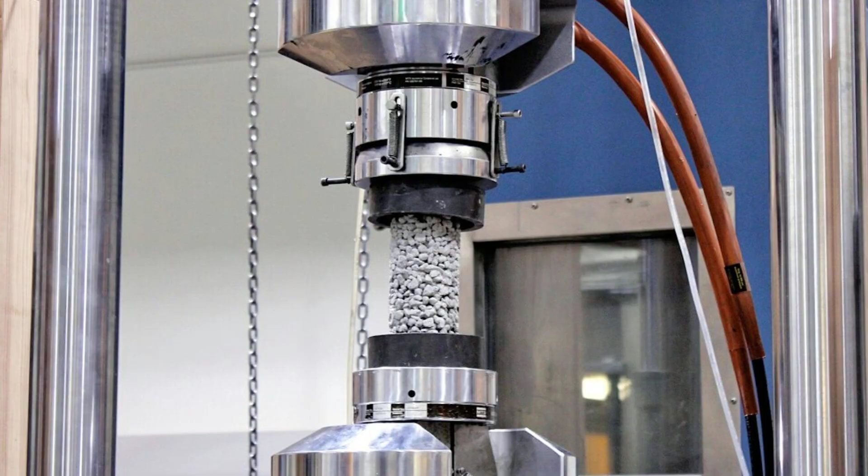But how do you knit continents together with cables and laser-guided drills? The answer's rewrite what you think is possible. Steel, concrete, and wind shape the world's most ambitious bridges, each one a laboratory for the limits of physics.

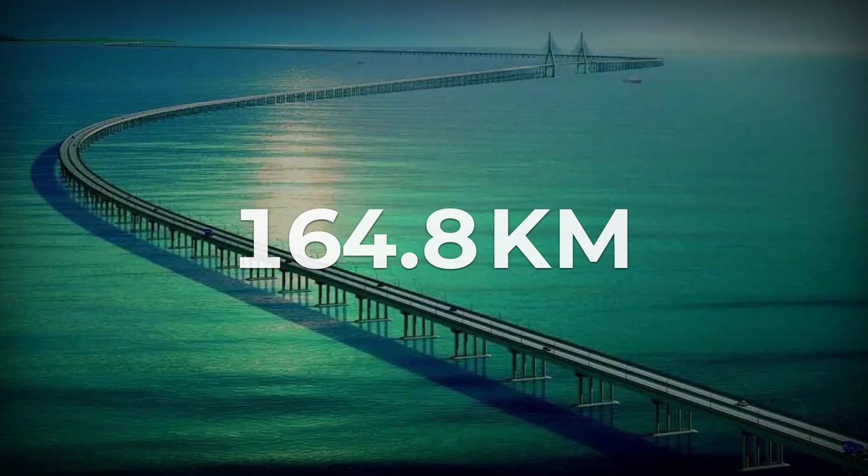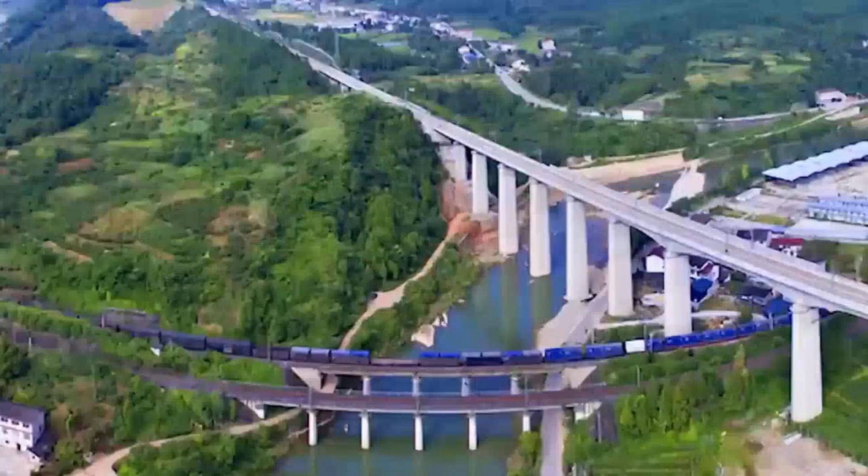In eastern China, the Danyang Kunshan Grand Bridge stretches for 164.8 kilometers, carrying high-speed trains across floodplains, rice paddies, and the Yangcheng Lake. Over 9,500 piers, set in rhythm like piano keys, lift the viaduct above shifting soils and wetlands. Modular construction lets crews slot in deck segments day after day, while seismic dampers and deep pile foundations anchor the structure against earthquakes and typhoon surges.

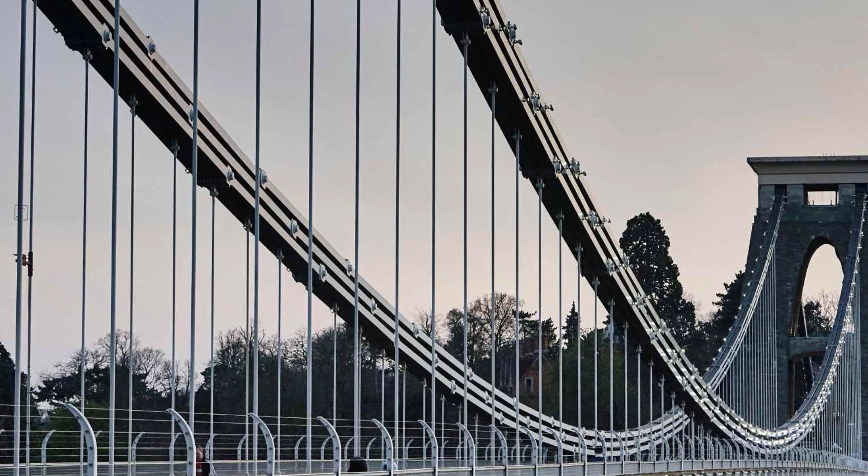But when the gap is too wide for repetition, engineers turn to cables. The Akashi Kaikyo Bridge in Japan spans 1,991 meters across the Akashi Strait. Its main cables, spun from enough wire to circle the Earth several times, are shielded by 4 layers of galvanization, wax, and polyethylene. In 1995, the Kobe earthquake shifted one tower nearly a meter overnight.

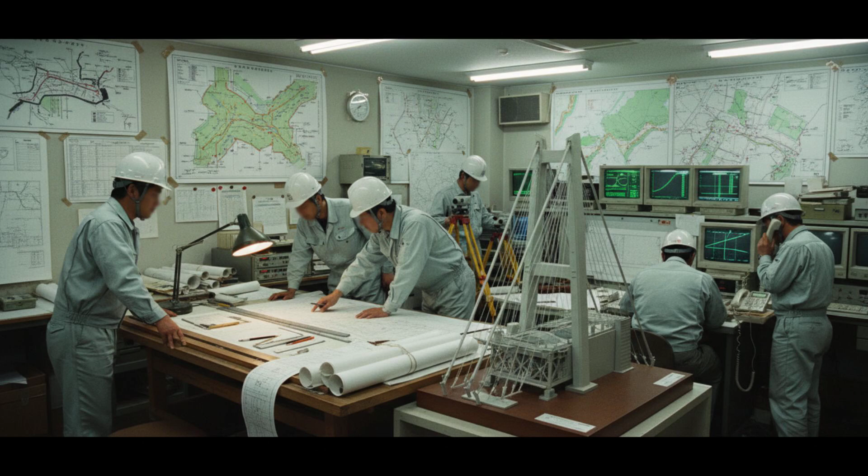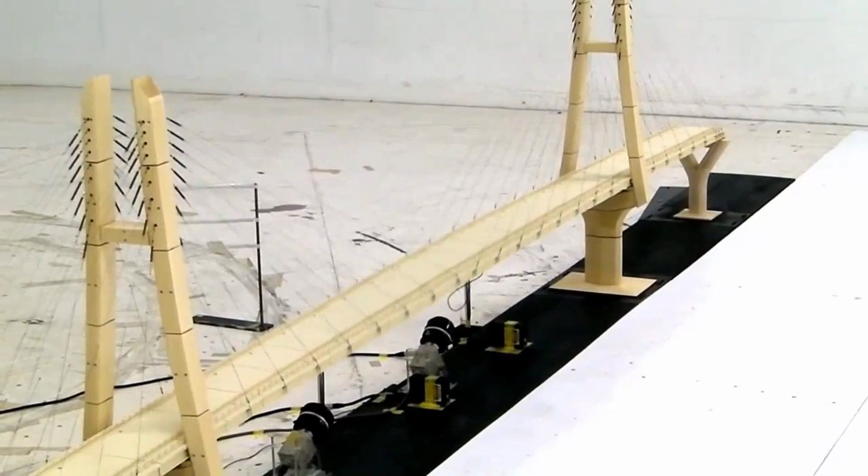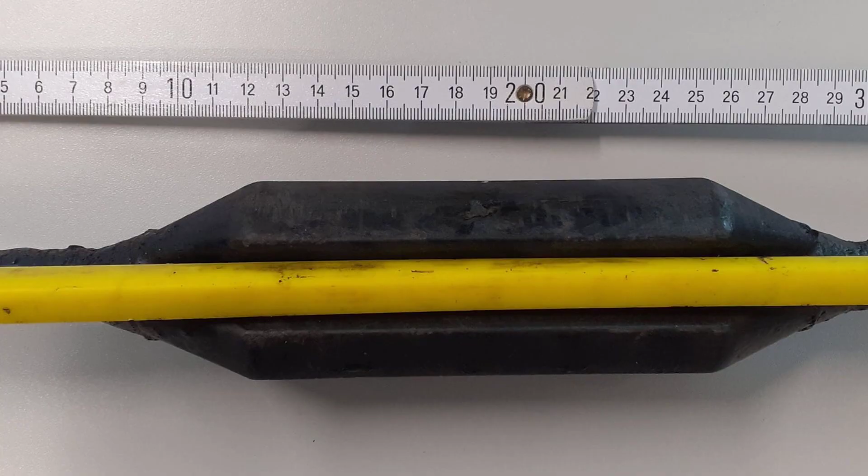Fiber optic sensors now live inside the cables, sending live data on tension and corrosion to inspectors who can intervene before disaster strikes. In southern France, the Millau Viaduct floats above the Tarn Valley on masts 343 meters tall, taller than the Eiffel Tower. Its deck, a multi-box girder, was honed by wind tunnel tests to flex, not fight, the wind. Slender piers, founded on 38-meter deep piles, allow the bridge to ride out storms with tuned mass dampers and live strain monitoring.

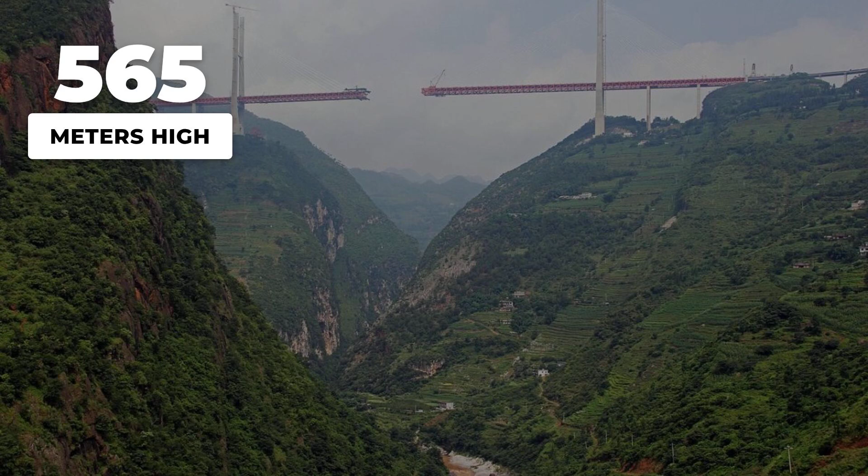China's Duge Bridge, perched 565 meters over a canyon, holds the record for the highest road deck on Earth. Engineers used double-wall box girders and bundled cable stays, tested against 200 km/h winds, then anchored into bedrock with gravity blocks and rock bolts. Inclinometers and GPS sensors track every millimeter of movement, ensuring stability above the clouds.

Each of these bridges is more than a path between 2 points. They are experiments in stretching steel, taming wind, and outsmarting gravity. At their heart is a relentless process of testing, monitoring, and learning, led by engineers who know that a bridge's real strength is measured not just in tons of steel, but in its ability to adapt to the unexpected.

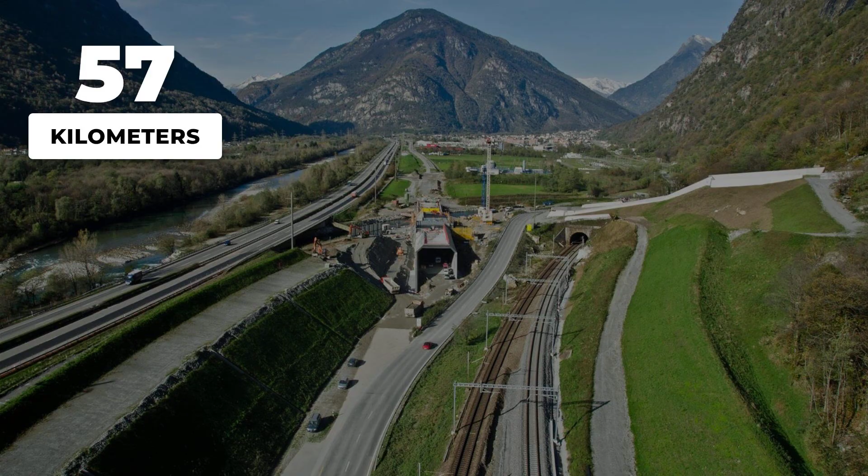Deep beneath the Swiss Alps, the Gotthard Base Tunnel slices through 57 kilometers of bedrock, longer than the Channel Tunnel and deeper than most skyscrapers are tall. Crews spent 17 years carving 2 parallel tubes, working under nearly 2,000 meters of mountain. Temperatures soared above 40 degrees Celsius.

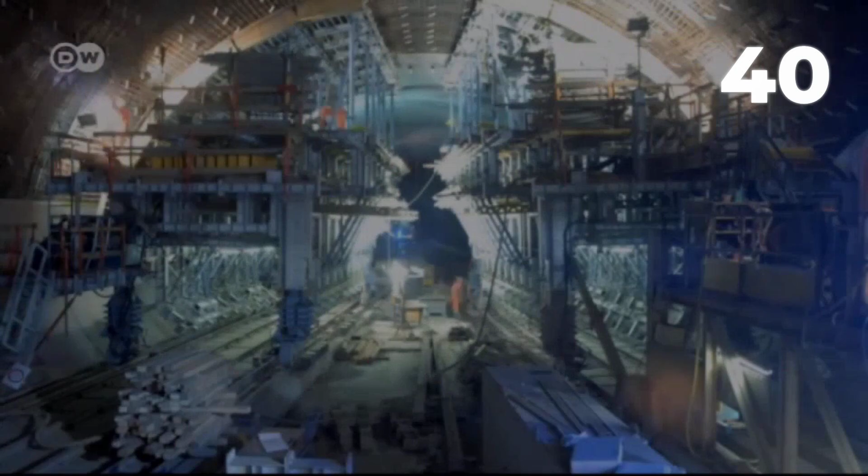Tunnel director Marcus Weiss called the greatest challenge cooling the mountain itself. 4 tunnel boring machines, each the length of a football field, chewed through hard gneiss and unpredictable squeezing zones, sometimes advancing only centimeters a day. Laser alignment kept the 2 ends on course, with the final breakthrough missing by less than 5 millimeters.

Ventilation systems blasted cool air to the front lines, while emergency shafts and hundreds of cross passages provided escape routes for crews facing sudden rock bursts or floods. In 2011, a cooling system failure trapped 17 miners for 9 hours, an ordeal that tested every safety protocol the team had built. Emerging from the tunnel, the world's fastest trains race across continents.

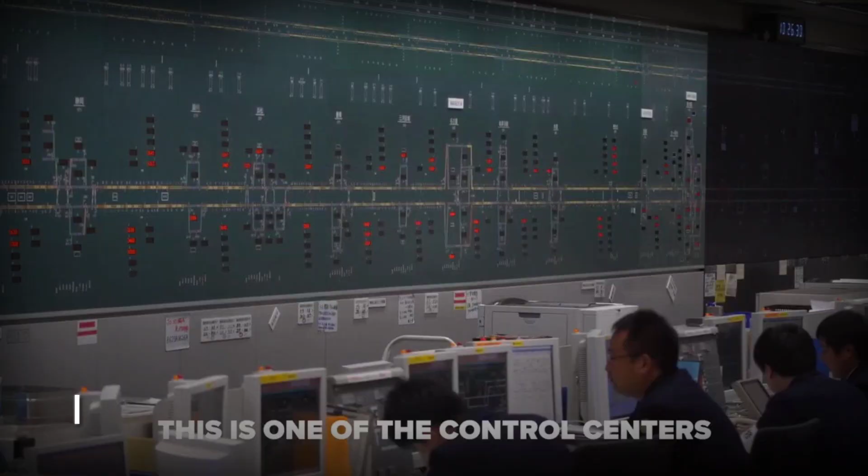Japan's Shinkansen is a lesson in discipline and precision. Bullet trains reach up to 320 km/h, yet average less than 30 seconds of delay per year. The rail operations chief credits a culture of punctuality that drills every staff member, from drivers to platform cleaners, in synchronized routines. Seismic sensors line the tracks. If an earthquake is detected, power cuts instantly and trains brake to a stop.

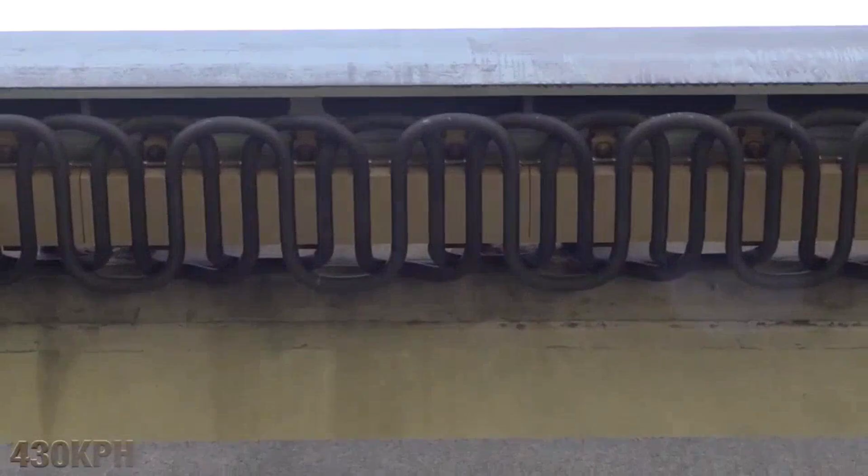The Shanghai maglev, floating on a cushion of magnetism, hits 431 km per hour on its short airport run. No wheels, just electromagnetic force keeping the car levitating millimeters above the guideway. Engineers monitor every joint and coil for heat and vibration, keeping the system in balance at speeds that rival a jet on approach.

Japan's next leap, the Chuo Shinkansen maglev, aims for 500 km per hour, tunneling under the Southern Alps for most of its route. Over 80% of this new line will run underground, with vacuum-sealed tunnels and pressure-controlled cabins to keep passengers comfortable as they cross mountains faster than most planes. These networks, both above and below ground, rely on relentless accuracy, millimeter tolerances, real-time data, and a mindset that treats every second and every degree as critical.

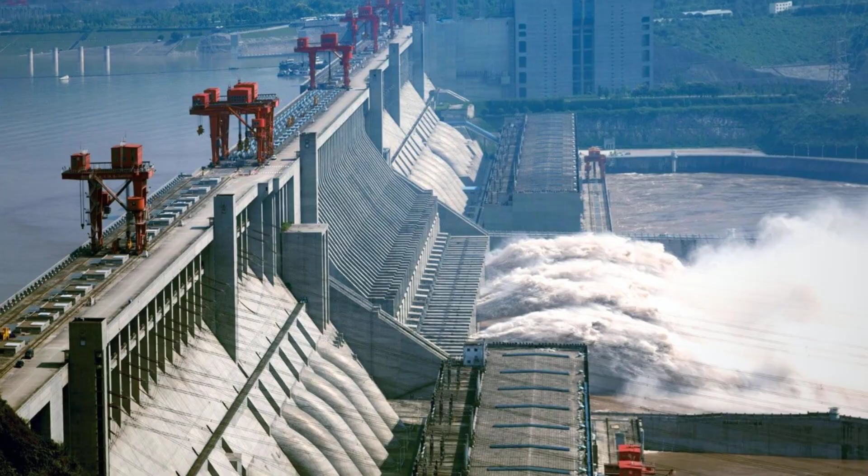On the upper Yangtze, concrete and water collide at a scale that bends imagination. The Three Gorges Dam stretches more than 2 kilometers across the river, rising 181 meters high, its bulk locking in a reservoir that snakes for over 600 kilometers upstream. Deep inside, 32 turbines spin out a combined 22,500 megawatts, enough to power entire provinces.

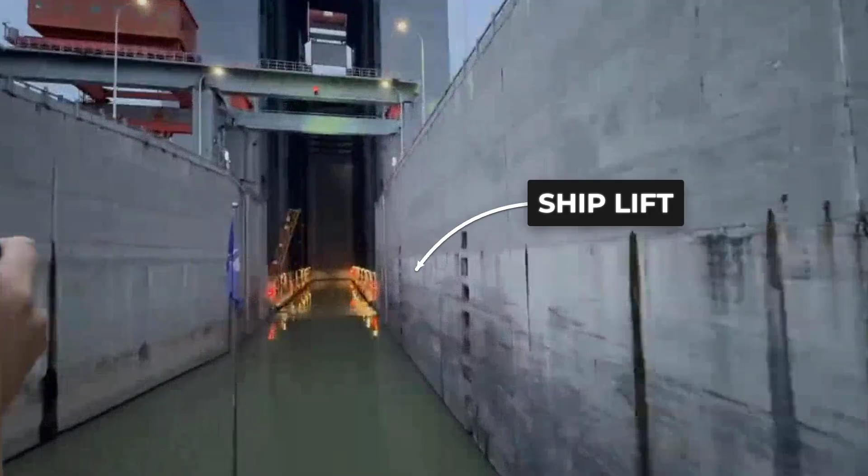But size is only the beginning. The world's largest ship elevator, nearly 100 meters tall, lifts vessels the height of a skyscraper in a single, counterweighted chamber, a vertical shortcut that slashes hours off river journeys for cargo ships too massive for the 5-stage lock.

Yet the real challenge is not just holding back the river, but keeping it alive. Every summer, the Yangtze surges with silt, threatening to choke turbines and raise the riverbed. At the heart of the dam's control room, the systems manager tracks sediment levels like a doctor reading vital signs. When the time comes, bottom sluice gates roar open, flushing millions of tons of mud and sand downstream in a controlled pulse. It's a delicate balance, too little, and the reservoir fills with silt. Too much, and downstream farms and cities risk flooding.

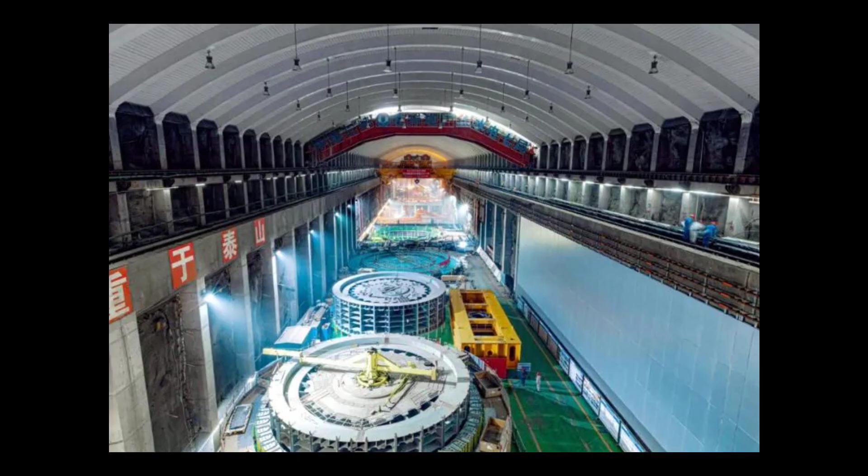Further west, the Baihetan Dam pushes arch design to new heights. Its double-curved concrete wall, nearly 300 meters tall, channels the Jinsha's force into granite cliffs. 16 giant turbines, each 1,000 megawatts, hum beneath the surface, cooled by water drawn from deep in the reservoir.

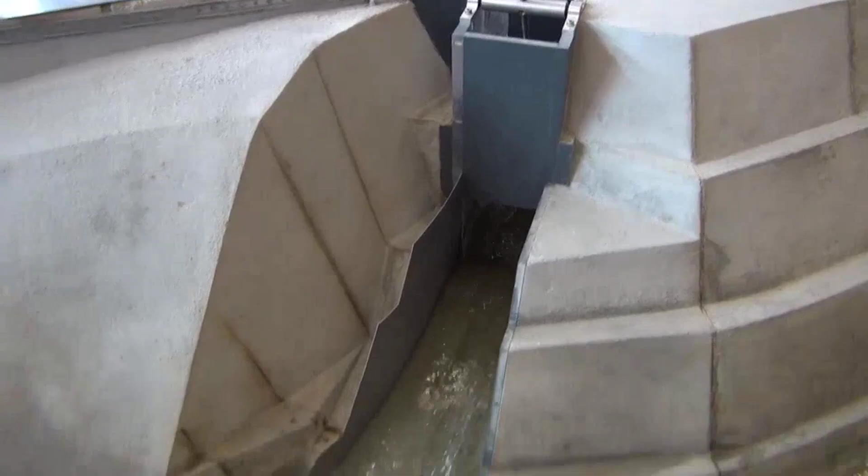Here, silt management is a team effort. High-velocity outlets at the base blast sediment out during peak flows, while a network of downstream dams catches what escapes.

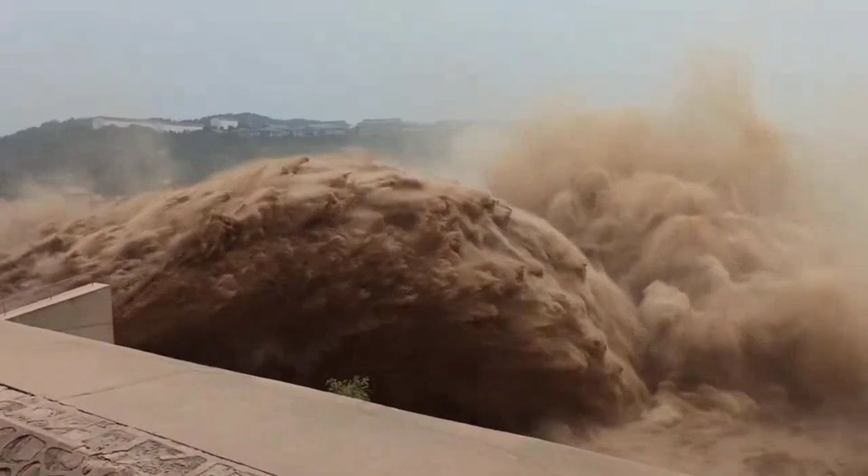Downriver on the Yellow River, Xiaolangdi's engineers face a river so muddy it's called China's sorrow. Their answer? Let the dam breathe. Each summer, water levels drop and silt tunnels open wide, sending a brown surge racing toward the sea. In a good year, up to 800 million tons of sediment clear out, an engineered exhale that keeps the river from rising and the turbines from grinding to a halt.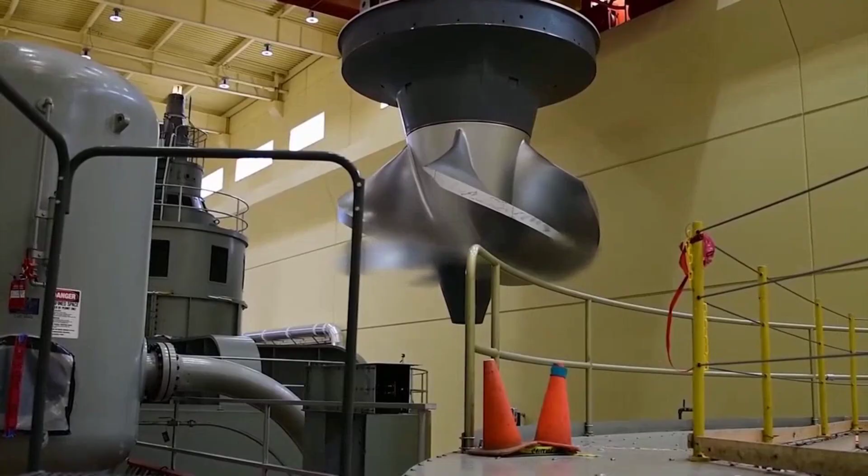The systems manager describes it as a negotiation. Power, flood safety, and a living river all pulling in different directions. Every decision is a trade, measured in megawatts, tons of silt, and the pulse of water that connects mountain to sea.

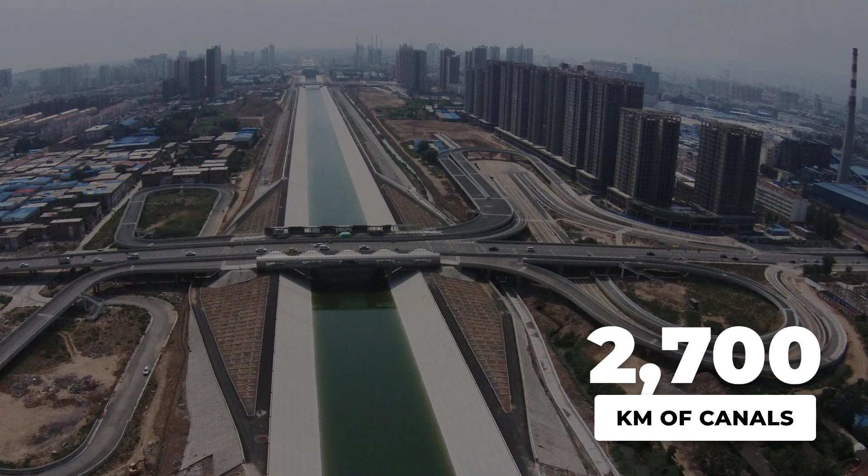Nearly 2,700 kilometers of canals and tunnels now move the Yangtze's water north, reshaping China's geography. The South, North Water Transfer Project, relies on pumps so large they could power small cities, lifting water in stages, sometimes 23 times along a single route.

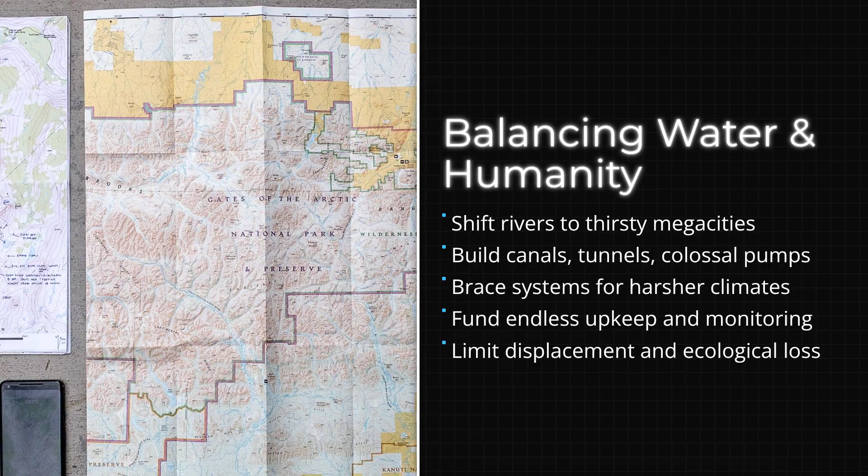Regional planners weigh each decision. Sending water north means less for southern farms and wetlands. Over 300,000 people were relocated, entire towns rebuilt on higher ground to clear the canal's path. For the planners, the work is a constant negotiation between supply, demand, and the human cost of redirection.

Tokyo's G-Cans system faces the opposite problem: sudden floods. 5 shafts, each deeper than a 15-story building, stand ready to swallow rivers when typhoons hit. Water surges through tunnels wide enough for trucks, gathering in a vast underground chamber lined with 59 concrete pillars. 4 jet turbine pumps, each matching a locomotive's horsepower, can move 200 cubic meters per second into the Edo River.

Every summer, the system is tested by downpours that once brought the city to a halt. Since G-Cans began, flood losses have halved, but planners warn that climate extremes are pushing the system to its limits. In the Netherlands, the Maeslantkering barrier guards Rotterdam.

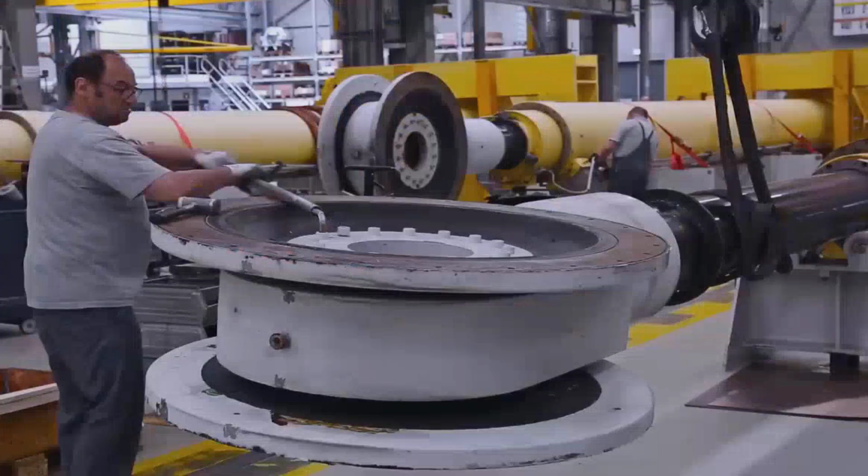Twin steel gates, each the length of a football field, swing shut when North Sea storms threaten, sealing off the port. Ball joints 10 meters across anchor the gates, inspected for fatigue cracks after every closure. A coastal defense engineer describes the annual ritual: ultrasonic scans, pressure tests, lubrication. The barrier has closed only 28 times in over 25 years, but each closure is a reminder. Millions of lives and Europe's busiest port depend on its strength.

Dubai's deep tunnel stormwater system takes a different approach, racing water out to sea. Pumps move 40 cubic meters per second through a 10-meter wide tunnel monitored for cracks and settlement. Here, maintenance is a race against time, because one failure could turn highways into rivers.

Where the land runs out, engineers invent new ground. The Hong Kong-Zhuhai-Macau Bridge stretches 55 kilometers across the Pearl River Delta, a chain of viaducts, artificial islands, and an immersed tunnel that disappears beneath the shipping lanes.

In 2014, a sudden rush of water flooded the undersea tunnel. A coastal megasystem engineer, still haunted by that day, describes the scramble. Divers sealed leaks with concrete bags, while giant pumps fought to hold the line. The incident forced a redesign of every segment seal and rewrote the safety playbook for the rest of the project. Today, the bridge tunnel carries tens of thousands of vehicles daily, its joints and pressure sensors checked with the vigilance of a submarine crew.

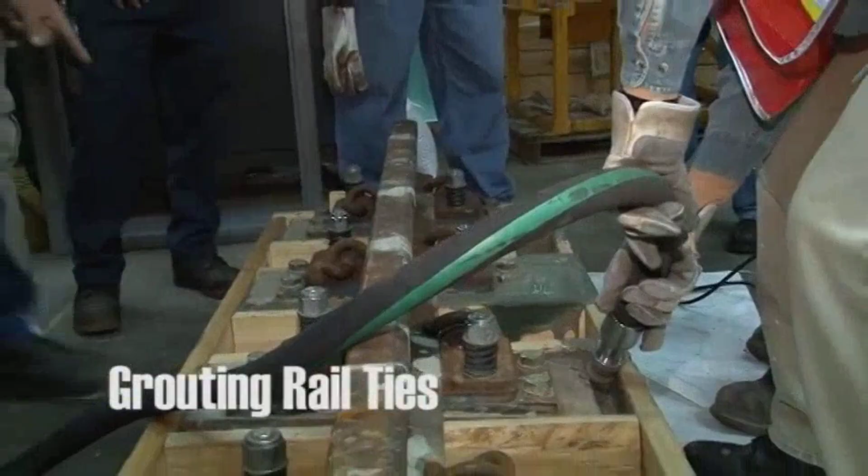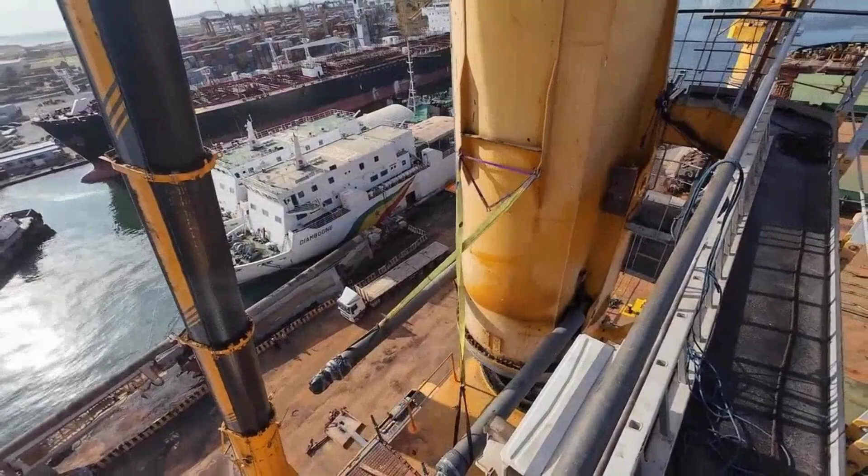On Singapore's western edge, the Tuas megaport rises from land that didn't exist a decade ago. Reclamation here means more than just piling up sand. Automated stacking cranes glide across the world's largest container yard, tracking every box by GPS. Algorithms choreograph the movement of ships and trucks, squeezing maximum throughput from every square meter. Beneath the surface, engineers monitor for ground settlement, adjusting fill, re-leveling tracks, and injecting grout to keep the port flat as it grows. Every few years, teams review sensor data and recalibrate, knowing that even a few centimeters of tilt can jam the automated yard.

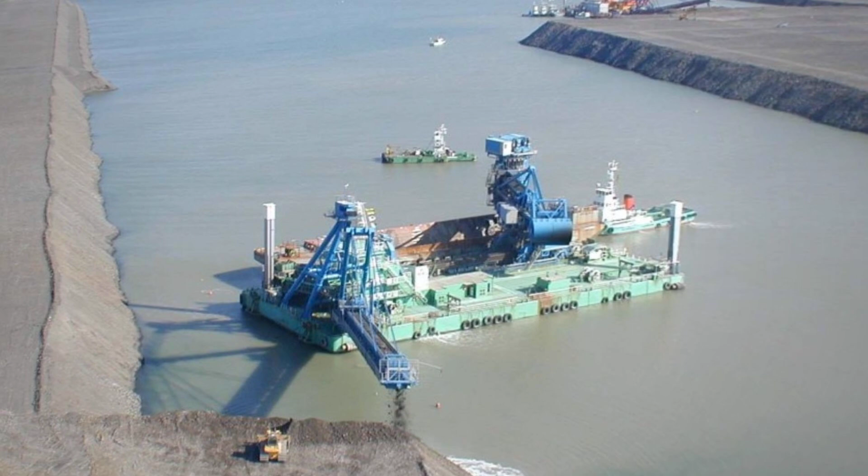Osaka's Kansai International Airport floats on a man-made island surrounded by seawalls and anchored to seabed piles. Yet the weight of runways and terminals pushes the ground down year after year. Maintenance crews inject concrete beneath the foundations, raising sunken sections back to level. The airport's survival depends on this cycle: predict, measure, correct, turning crisis management into routine.

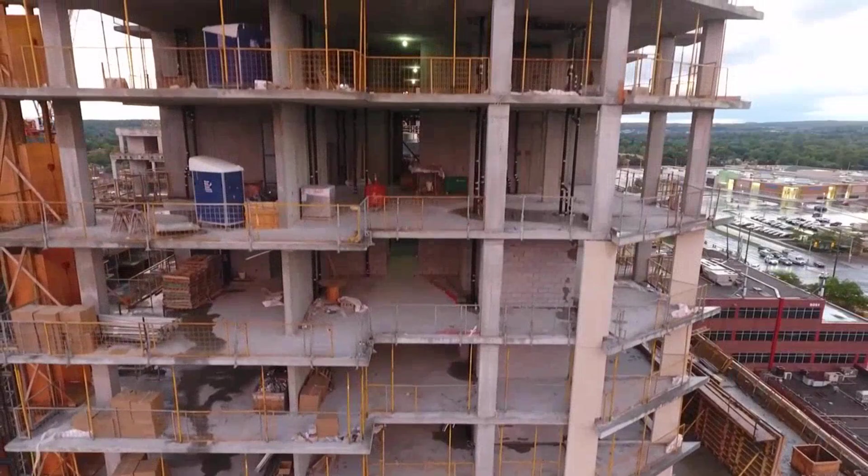Across these sites, the boundary between land and sea is never settled. For coastal engineers, stability is a moving target, and the only constant is adaptation. Glass, steel, and concrete reach for the clouds in a new kind of arms race, one where height, spectacle, and digital skin redefine the skyline.

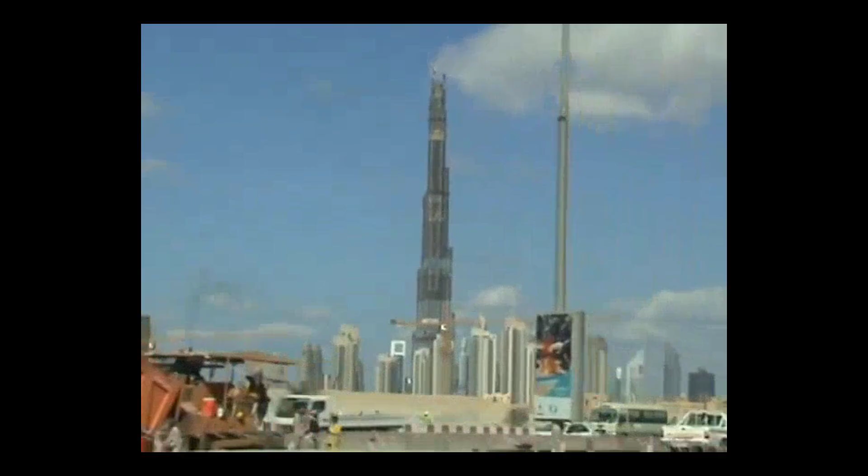In Dubai, the Burj Khalifa rises 828 meters above the desert, its Y-shaped core and staggered setbacks breaking the wind into harmless eddies. During construction, a single concrete pour climbed 600 meters in a 32-hour marathon, with teams scrambling to clear a jammed pump line before the mix set solid.

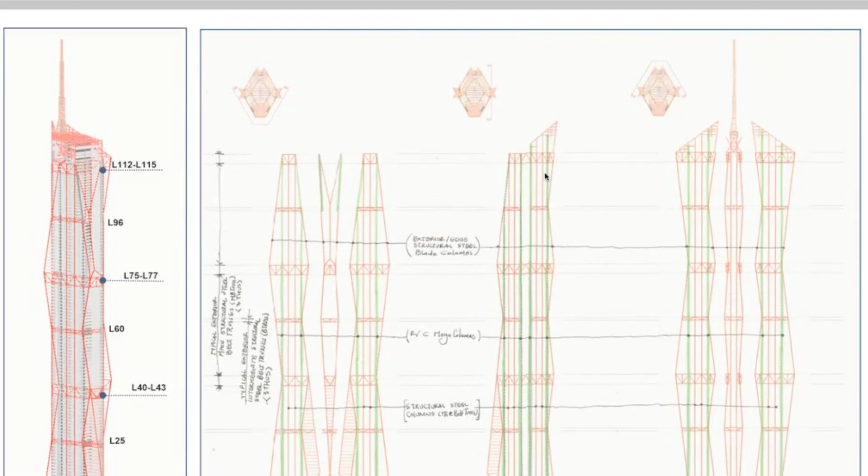The project's lead engineer still recalls improvising with ice slurries and custom blends to keep the pour alive. In Kuala Lumpur, Merdeka 118's triangulated glass facade twists 679 meters above the old stadium, its sharp edges channeling typhoon winds down the structure. The architect behind its shimmering skin calls it a fusion of tradition and tech, each panel angled for stiffness, light, and a nod to the city's past.

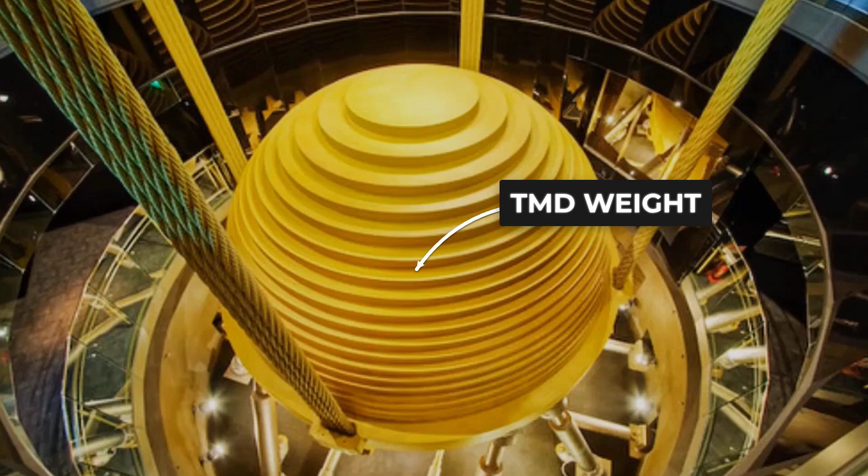Shenzhen's Ping An Finance Center cuts wind loads by nearly half with its aerodynamic taper. Tuned mass dampers, giant steel weights, sway inside the crown, calming the tower when storms roll in.

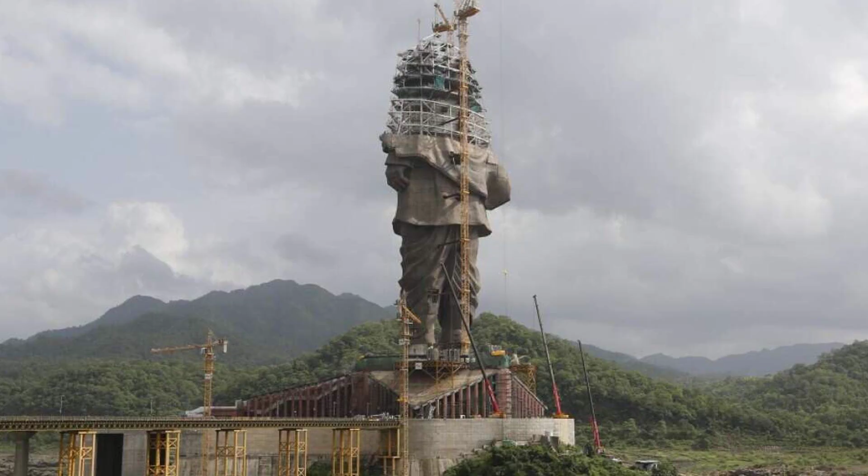But vertical ambition isn't just about height. India's Statue of Unity stands 182 meters tall, assembled from 2,000 bronze panels, each mapped by GPS to fit the contours of a national hero.

In Las Vegas, the Sphere turns architecture into a media event. Its 112-meter dome is wrapped in a programmable LED shell, the world's largest digital canvas.

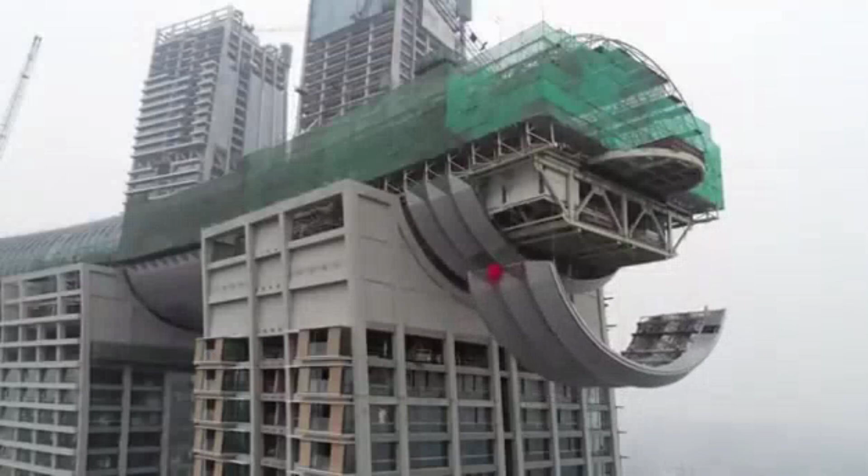Across Chongqing's skyline, the Raffles City Crystal floats 250 meters up, a 12,000-ton sky bridge linking 4 towers. Below, the rain vortex at Jewel Changi Airport drops water 40 meters through a glass funnel, its pulses and light shows choreographed by computer.

For these megaprojects, engineering and art collide. Towers become wind-tuned sculptures. Buildings double as instruments, screens, and symbols, each one pushing the limits of what a city can be.

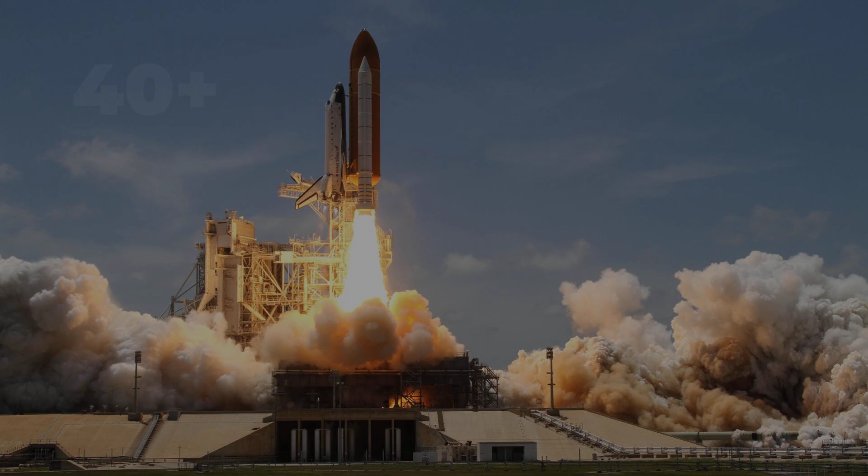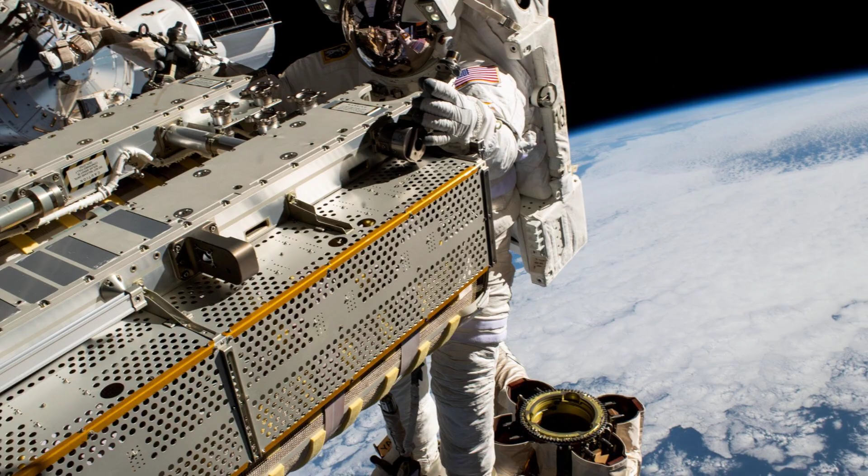400 kilometers above Earth, the International Space Station circles the globe every 90 minutes. Its assembly demanded more than 40 launches, with modules crafted on 3 continents, each tested for the smallest flaw. Astronauts rely on welds X-rayed for hidden cracks, seals pressed to perfection because a single mistake can't be fixed from the ground. The ISS is a living experiment, its systems upgraded in orbit, every repair a high-stakes gamble.

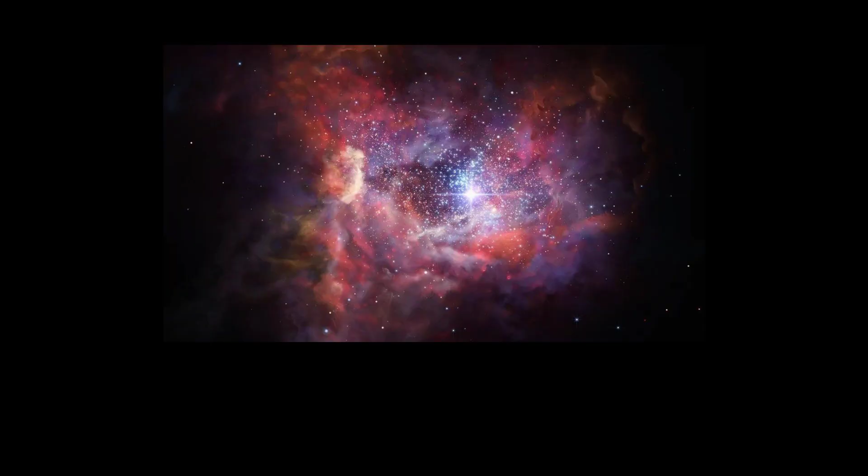Farther out, the James Webb Space Telescope sits 1.5 million kilometers away, beyond the reach of rescue. Its gold mirror, folded tight for launch, had to unfold flawlessly in the cold of space. Cryogenic cooling chills its sensors to just above absolute zero, letting it catch the faintest glow from the universe's first stars. For the deployment scientist, there was no backup plan. 107 release mechanisms all had to work, or decades of hope would vanish.

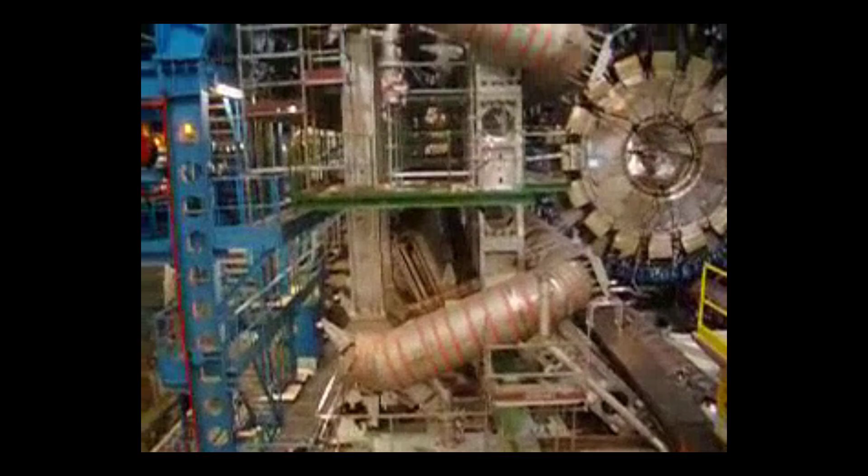Beneath the French-Swiss border, the Large Hadron Collider forms a 27-kilometer ring, cooled by 120 tons of liquid helium. Protons race at nearly light speed, guided by magnets so precise that a weld out of tolerance or a magnet misaligned by a millimeter can halt the world's most powerful experiment.

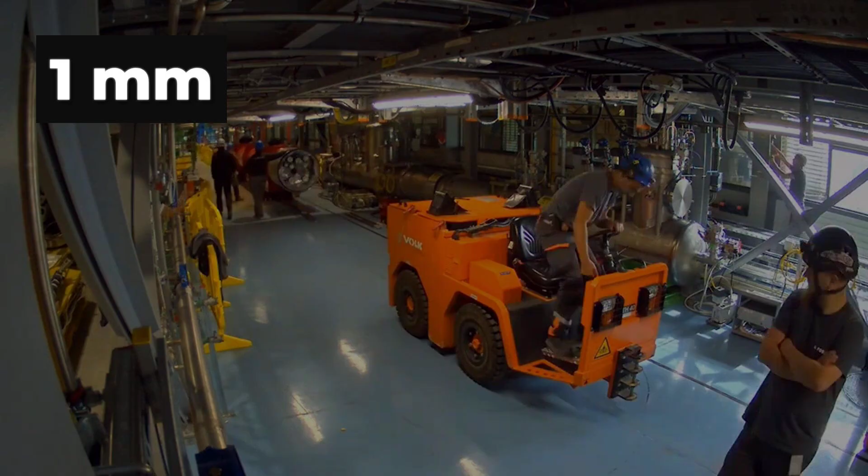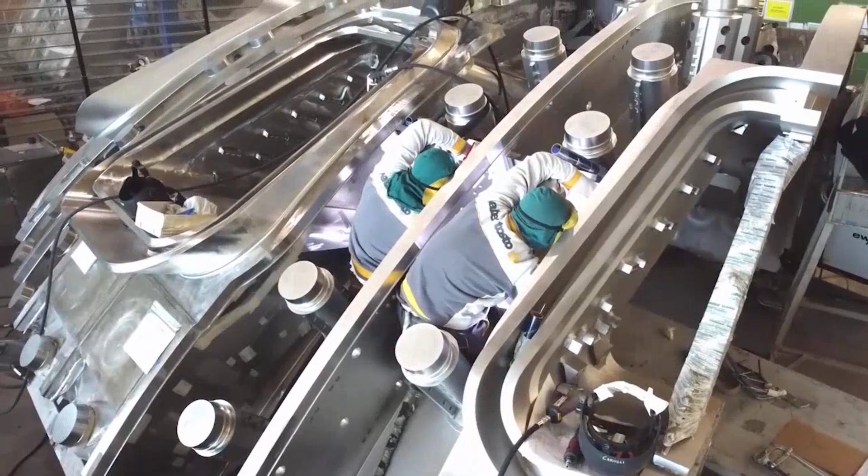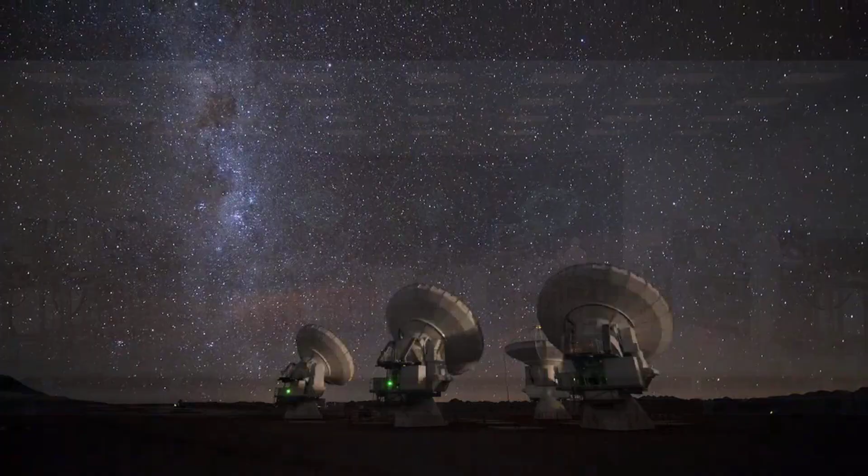In southern France, ITER tries to bottle a star, fusing hydrogen at 150 million degrees. Every weld on its vacuum vessel is a potential failure point. Across South Africa and Australia, the Square Kilometre Array listens for signals from the dawn of time. Its antennas stretched across continents, fighting interference from cell phones and satellites. Here, ambition is measured in microns and megawatts, but fragility is the true test.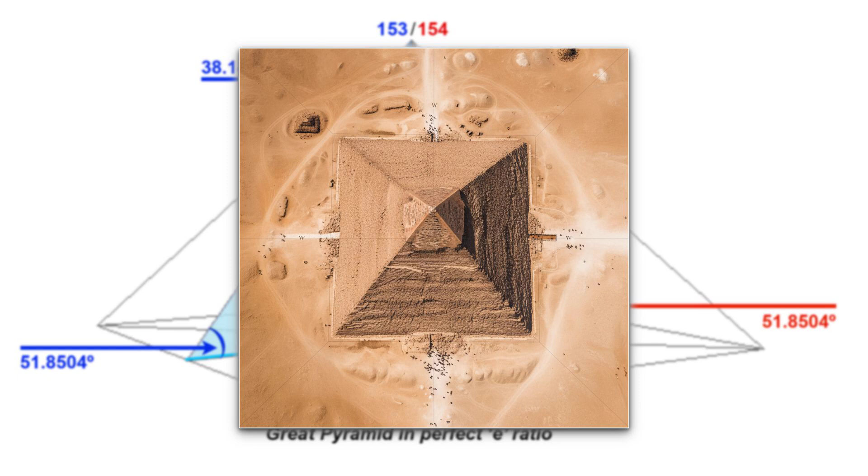Before steel and concrete, ancient builders set standards that still test the limits of modern engineering. The Great Pyramid at Giza, assembled from over 2 million limestone and granite blocks, stands with its base aligned to true north within a fraction of a degree. Each side deviates by less than 4 centimeters across 230 meters, a precision achieved with sighting rods, ropes, and the stars. Some blocks, weighing up to 15 tons, came from quarries as far as Aswan, floated down the Nile during its annual flood.

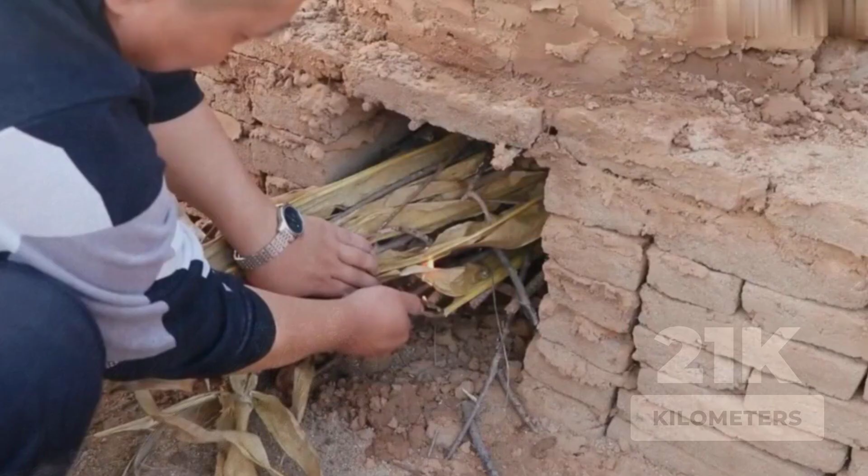The Great Wall of China stretches more than 21,000 kilometers, crossing mountains and deserts. Ming-era builders fired bricks on site, shaped the wall to the land, and raised watchtowers wide enough for marching columns and signal fires. The wall's scale and endurance speak to a vision that spanned centuries.

In Cambodia, Angkor's engineers built a city of water. Vast reservoirs, canals, and moats channeled monsoon floods, irrigating fields and cooling temples. LiDAR scans reveal a hidden network of embankments and ponds beneath the jungle, exposing a metropolis shaped by hydraulic mastery.

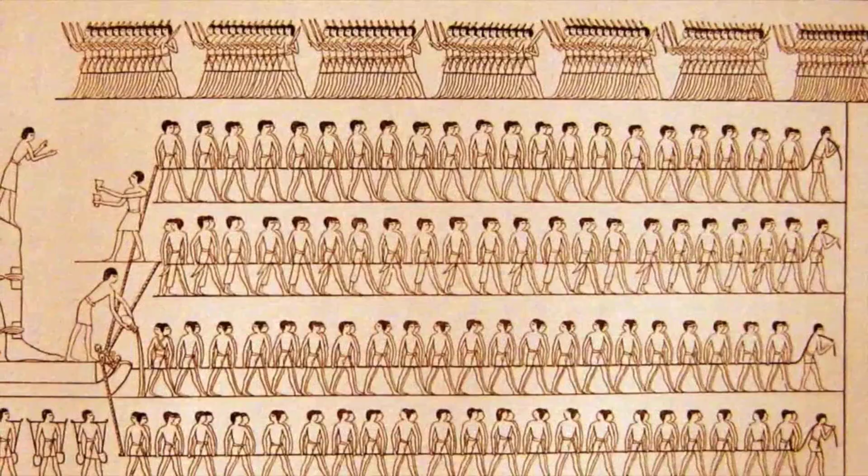High in the Andes, Sacsayhuaman's limestone blocks, some weighing 125 tons, fit together without mortar. Their jigsaw pattern and sloped faces let the walls withstand earthquakes that toppled later structures. At Baalbek in Lebanon, the Temple of Jupiter's podium rests on stones weighing up to 800 tons. These megaliths, cut and set with millimeter accuracy, were moved with levers, sledges, and sheer determination.

Each monument stands as a silent challenge. With simple tools and collective will, their makers achieved what many still struggle to explain, leaving questions that echo through every new ambition. From the Danyang-Kunshan Grand Bridge, stretching 164.8 kilometers, to the Great Wall's 21,000-kilometer span, humanity's largest projects have reshaped land, water, and even the boundaries of knowledge.

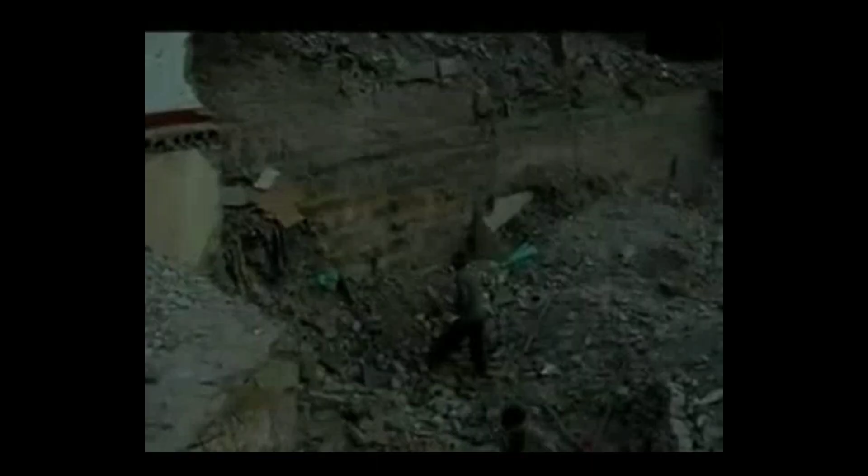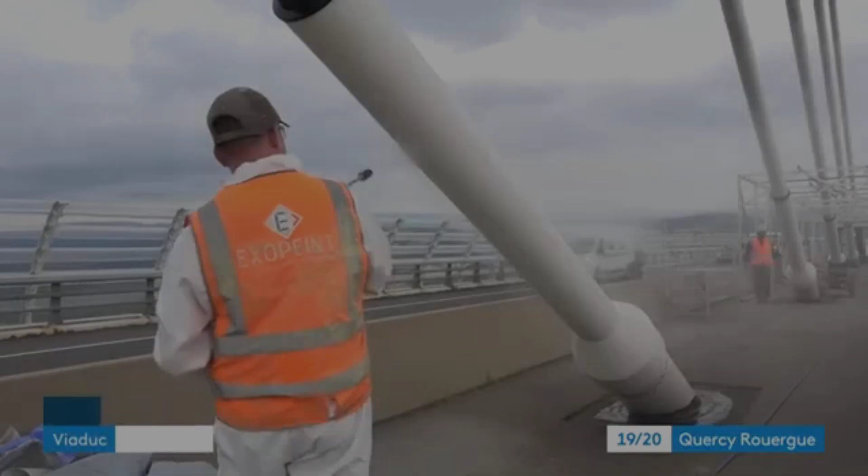Records show that the Gotthard Base Tunnel required over 2,400 workers and 28 million tons of excavated rock, while the Three Gorges Dam displaced more than 1.3 million people. Yet, despite detailed construction logs and engineering blueprints, the precise methods behind some ancient feats, like the Great Pyramid's sub-centimeter alignment, remain unresolved. Today, official reports confirm that several megastructures face mounting maintenance costs and carbon footprints, and the long-term impacts of mass relocation and ecological change are still under study.

Across eras, one fact stands: every megaproject is a record of both ambition and consequence. As engineers and societies commit to future builds, the archived evidence reminds us that true progress weighs innovation against its lasting footprint.